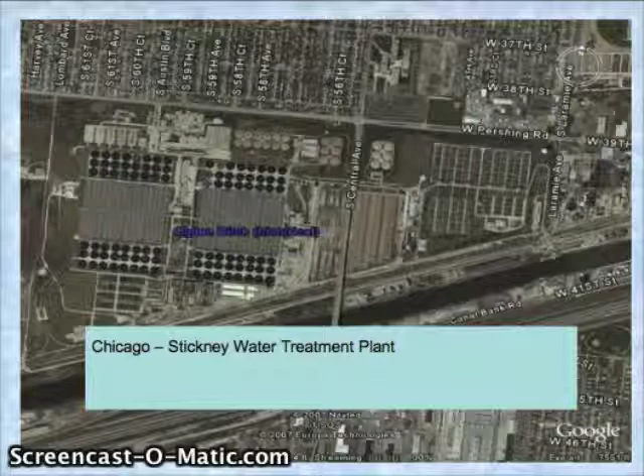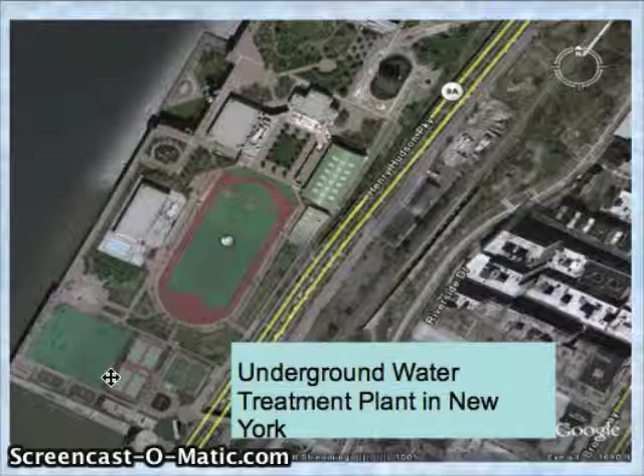Now here's an underground water treatment plant in New York City. And you might look at it and say, what? Where's the wastewater facility? Well, when you're in a large community like New York and you got all these high-rise towers, what they actually did was put it underneath. It's on one level, and then they built this entire athletic park above the wastewater treatment plant. Because let's face it, no one wants to live in one of these high-rise towers looking out at a water treatment facility. So let's get back to Baraboo. So this was Mr.

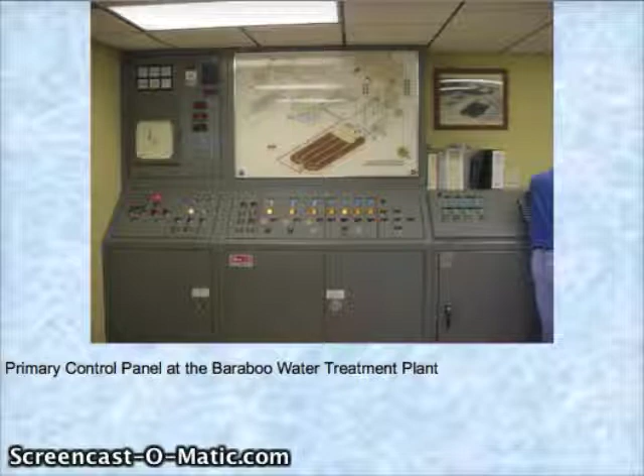Now, this is one of the control panels that controls all the wastewater treatment facility. And because it is such an important thing, you don't want it to be going out. You don't want it to have a breakdown. They actually had a secondary control panel that would run everything. So they wanted to make sure it would always be running.

Now, I'm going to tell you a little story here. And some of you may take this story and you may cry. So look over at the Kleenex boxes. If you need to grab a Kleenex, please do so. But how many of you had a fish at one time? Raise your hands. Okay, I see a couple of you have your hands raised. Now, if your fish passed away, and I know because my son had several fish, and for some reason, the Wittoon family, we're not good with pets. Our fish always seem to die.

Now, if you're like our family, what did you do with your fish? What did you do with your fish? Okay, what did you do over there with your fish? Now, if you said you had a ceremony and you flushed it down the toilet, well, that's what we did. And if we didn't do that, we put it in a nice little coffin box and then we put it into the trash can, so it would be buried properly. But a lot of times we just put it in the toilet and we flushed. And did your parents say that your fish is going to go to fishy heaven?

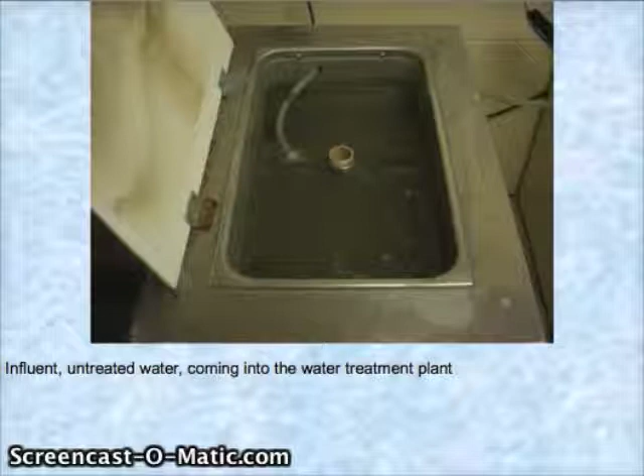And that takes me back to a story of my youngest son. He's in third grade now. But when he was about 3 or 4 years old, I noticed that our downstairs bathroom was not flushing. And I couldn't figure out why. And then once I started looking a little bit more carefully, I noticed that he had flushed little people. You know those little people that you played with? How many of you played with little people? Well, he wanted to see how many little people he could flush down the toilet at once. I was not happy. I could not get it unplugged.

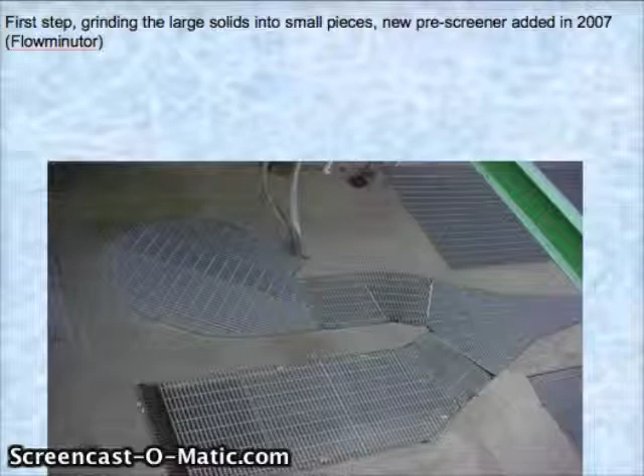So here's a 3-year-old, 4-year-old, I forget how old he was. I dragged him along with me to Menards at like 6 in the morning. As soon as they opened up, I was up there. And we got what I call a super plunger. And it took quite a long time to flush it down. But those are the types of things that this grinder is needed for. They need to grind sticks, balls, washcloths, things like that. They need to grind them into smaller pieces so it doesn't wreck the rest of the equipment.

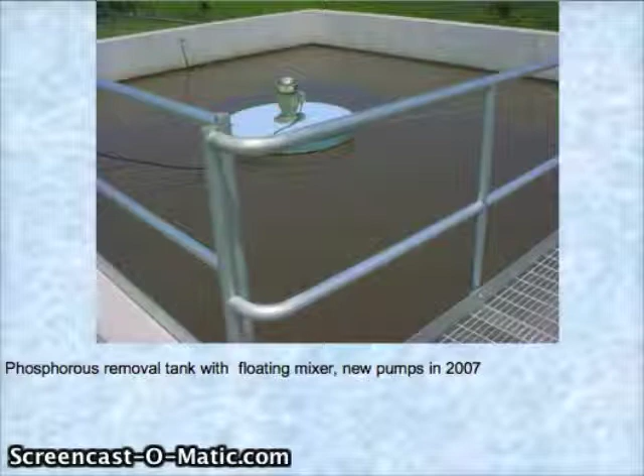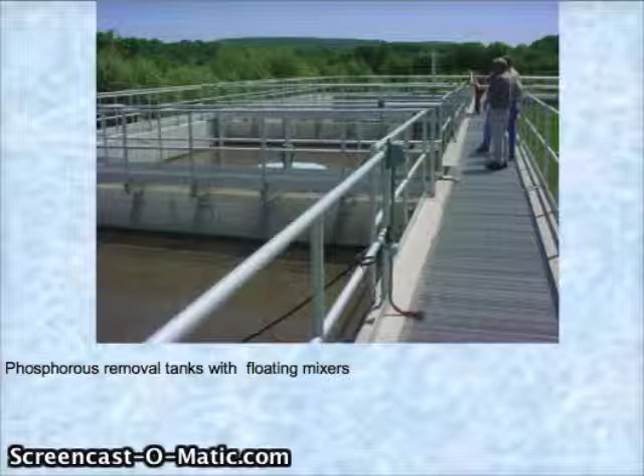So here we go. This is a phosphorus removal tank with floating mixers. And the new pumps came in 2007. And here there's several tanks lined up. And if you can see, I'm in the background. Mr. Phillips is taking a picture. And we're talking about how the phosphorus is being removed. So here we do have phosphorus being removed from the water.

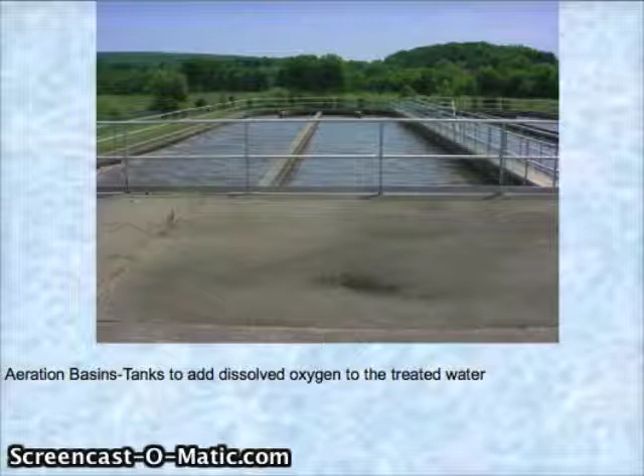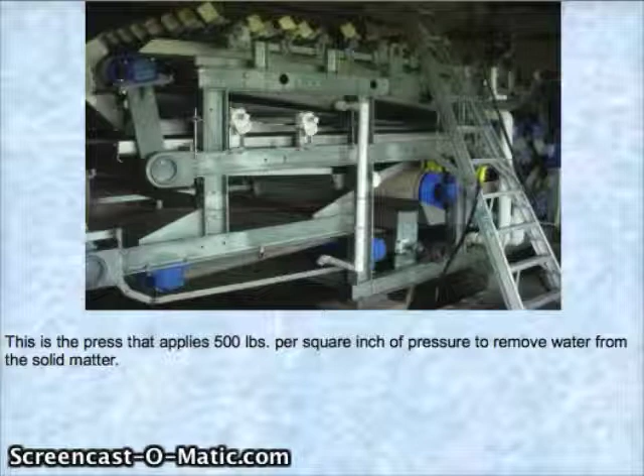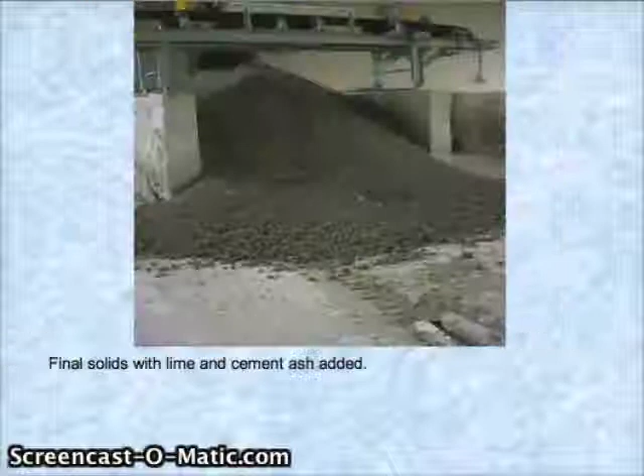And ultimately, all the sludge, all the things that drop to the bottom come here. And this is a press, and it applies 500 pounds of pressure per square inch. And this is actually used to remove all the water from the solid material. And once it comes through here, they add some lime to it. And here's where Timmy's journey ends, at the Baraboo wastewater facility.

So when you look at all these things, you might say, well, what is that? Well, that's all of your sewage. This is where Timmy ends up. And you might say, well, what do they do with this? Well, in the wintertime, they store it in these large sheds. And once summer rolls around, they will actually either pay farmers, or sometimes farmers will pay them to spread it on their fields. It's manure.

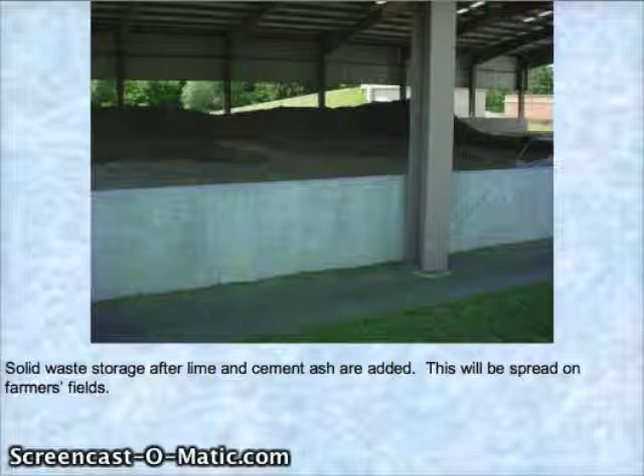And I know some of you are thinking, oh, that's gross. But what's the difference between spreading our poo on a cornfield or a hay field or a vegetable field, or cow manure or pig manure? It's all used to fertilize the ground.

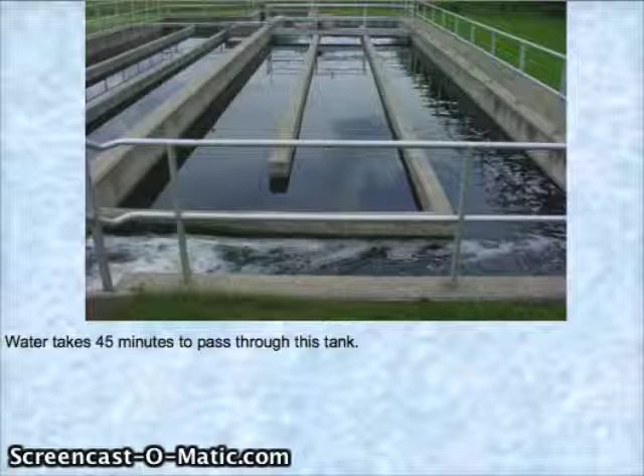Now, the journey for the water does not end. They used to add chlorine to the water, but as of 2007, they actually use ultraviolet light to kill any bacteria. Then it goes through these steps, and when they added the chlorine, it would actually take 45 minutes to pass through this entire tank. And then eventually, the water comes down some stairs, and this is designed to add more oxygen to it.

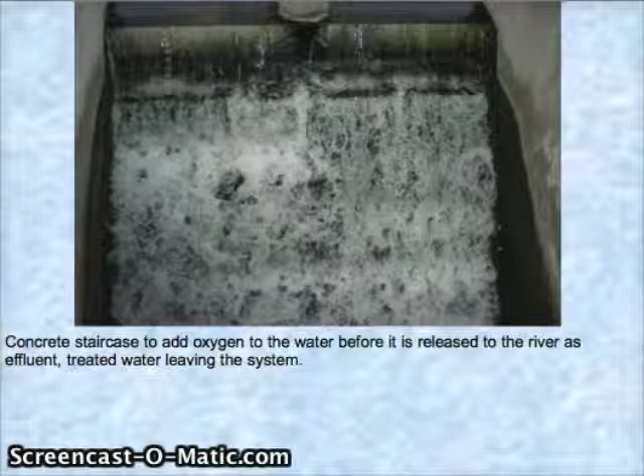And if we remember, I told you that this is located right next to the Baraboo River, and the reason for that is the wastewater is sent right back into the Baraboo River. Now, some of you are probably saying, gross. Well, how many of you have ever taken a tour of the treatment facility? And if you ever notice, there's a fish tank back here. And that fish tank is with water that comes from the treatment plant.

And Mr. Dora was explaining that they have the fish in there with this water so kids could see how clean the water is. It's clean enough we could actually drink it. But you can see that it's really clean. It's probably cleaner than the water in the Baraboo River. So it goes back in the Baraboo River.

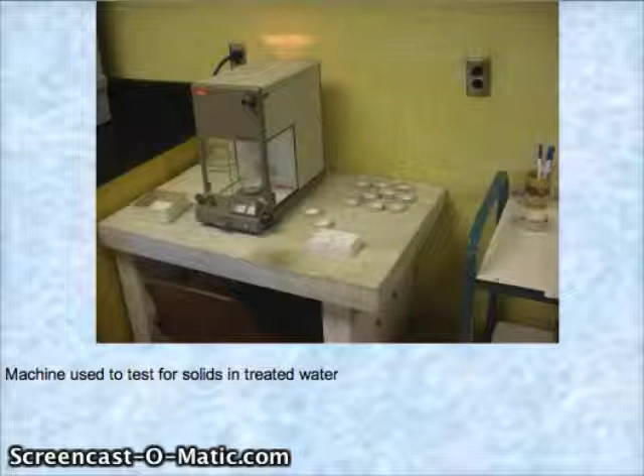Now, this is one of their labs. We've done a lot of neat things in our lab throughout the year. And you see graduated cylinders, you see beakers. Well, they have a lot of that same equipment here. Here's one of the neat machines. They actually test the water for solids to make sure the water that's going into the Baraboo River is free of any solid material.

Now, the other interesting thing about what goes on is that there's some lift stations. When you flush the toilet, for the most part in Baraboo, that sewage goes downhill to the wastewater treatment facility.

There's only a couple spots. This was by the old Pierce's. It's not a Pierce's, it's a, what is it? It's like a renewal center. It's where they sell used windows and stuff like that. It's out by the log cabin. So that's one of the lift stations. And there's one other lift station.

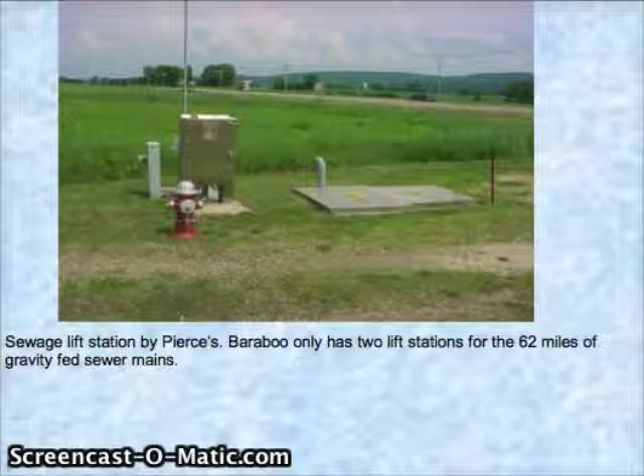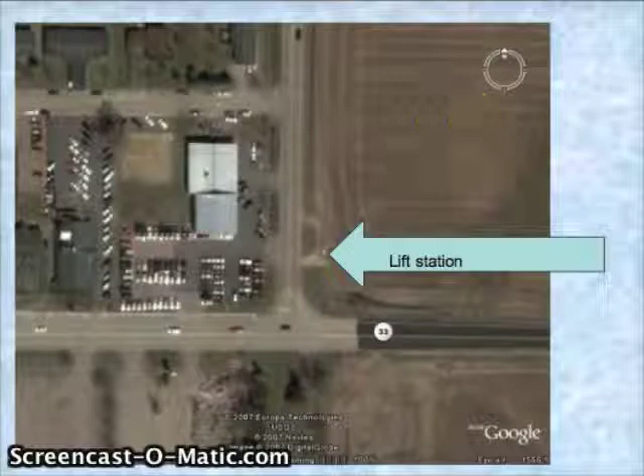Otherwise, everything else, 62 miles of sewage here in Baraboo is basically gravity fed. And so there's the lift station. And here you see the log cabin right here. And here's one of the booster stations. And I'm not sure how much this booster station gets used anymore because they actually put out the new water tower out by Menards. And that's to make sure there's enough water pressure in Baraboo, up at Menards and up at Walmart.

Now, you might think of these storm sewers that you see out on the roads. A lot of people think these lead right to the sewer plant, and a lot of these actually lead directly to the river. Now, there have been updates in the law, and more recently, municipalities are supposed to actually treat all their stormwater as well. And for a town like Baraboo, it's not a huge issue, but can you imagine a city the size of Milwaukee, and what are they going to do with all their water?

And I don't know if you knew this, but there was actually a big dig in Milwaukee, and there's a huge tunnel underneath the city of Milwaukee, and that's where they store a lot of their rainwater until they can treat it. In the olden days, a lot of that accidentally would get dumped into Lake Michigan. So if you were down in Milwaukee and you see a beach and you see something that looks like a Baby Ruth candy bar, it's not a Baby Ruth candy bar. It was probably a little Timmy floating around, because if the sewer plants got overwhelmed by a lot of rain, the treatment facilities, they had to dump their sewage.

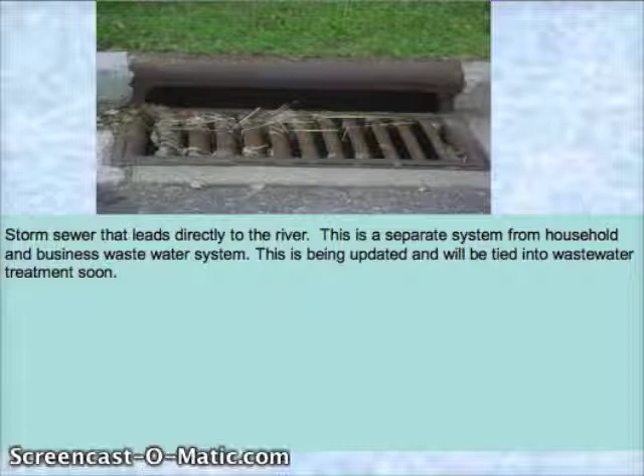And it's no different when we had our last flood. If you remember, when we had our last flooding, Reedsburg sewer plant was overwhelmed, and some of that debris got into the Baraboo River.

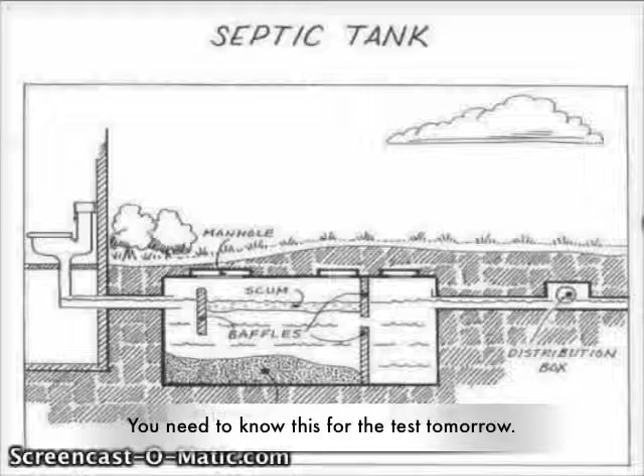Now, I do want to take a few minutes just to talk about septic systems. These are the septic tanks that you see out in the country. And you are going to have to know this for the test. So you have a handout. So know all these different parts. You're going to have to identify them on a test. So let me repeat this. If you're not listening, yes, you in the back, if you're not listening, you need to know this for the test. So make sure you study it.

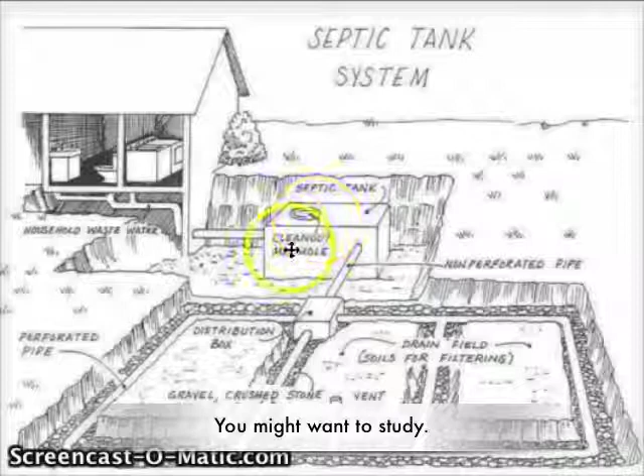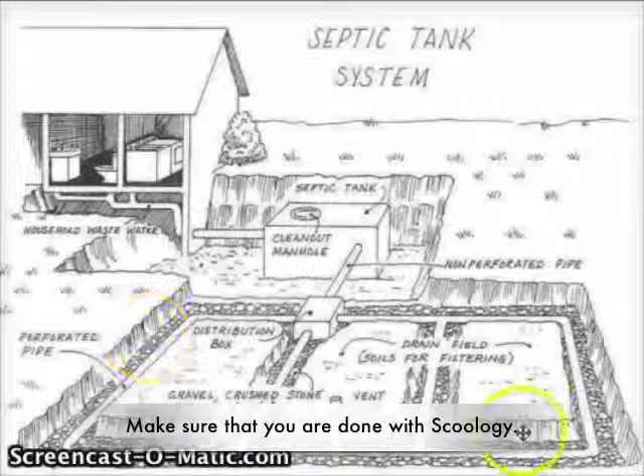So you need to know the different parts, the septic tank, the clean out. Right here, those are usually above ground, where you can get down into it and you can clean these out. Then you have your drain field or your distribution center. Remember, 99% of sewage is water. So where does all that water go? Well, you're not going to store that in a tank. Most of it goes into the drain field, and the ground actually does a really nice job of taking organic waste and cleaning it so it doesn't pollute the groundwater.

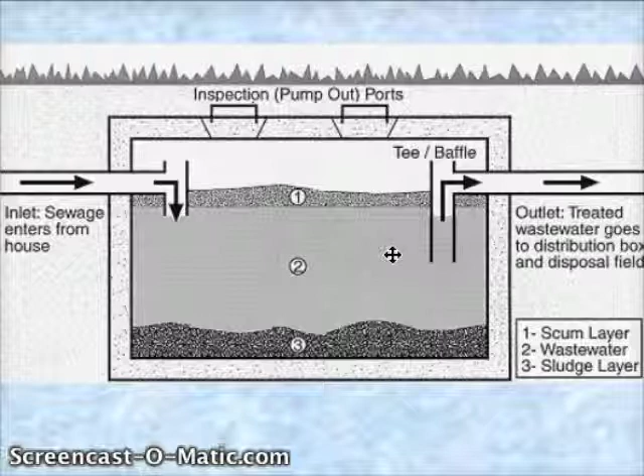So here you can see you got a tee baffle, you got your scum on top, you've got your solids on the bottom. Now when this fills up, that's why if you live in the country, how many of you live in the country? If you live in the country, you have a truck come out and it pumps this out every so many months, maybe once a year. If you've got a small family, maybe every other year. But you need to get these pumped out, otherwise your septic system will back up.

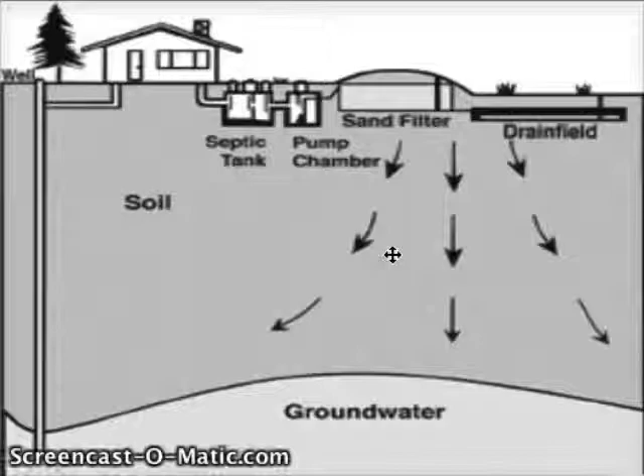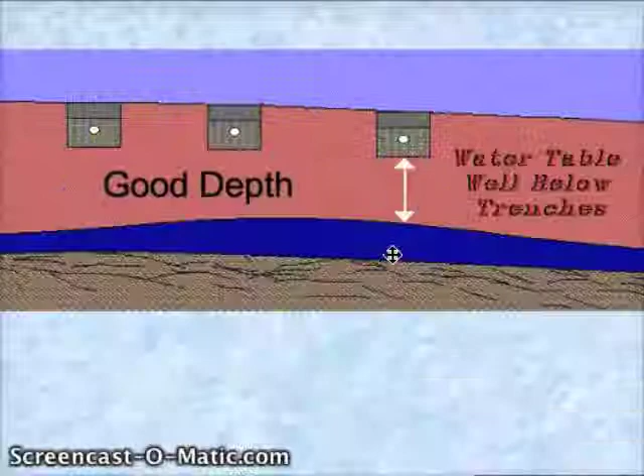Now, they have had problems with these in the past. If these are not placed properly, if you have poor drainage, this could pollute the groundwater. So it's really important to have good depth between your drain field and the groundwater. If not, you could pollute the groundwater.